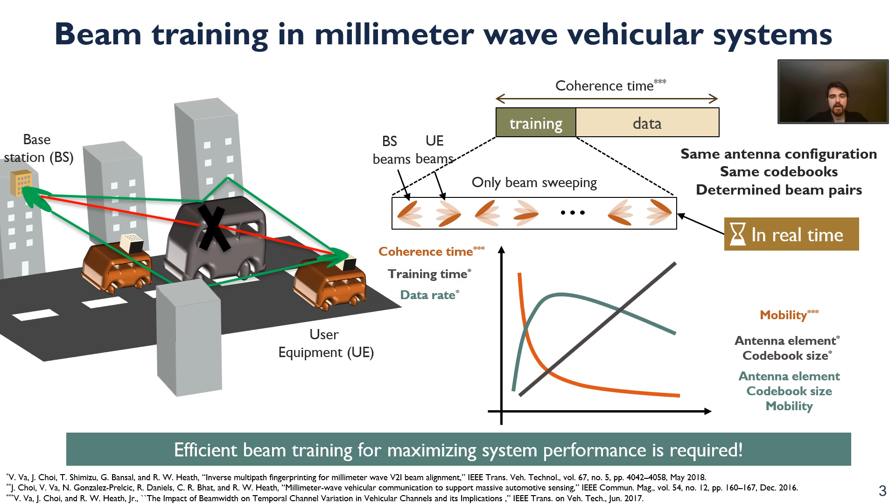The beam training problem was tackled by many approaches in the literature, and one of the solutions is to use side information in the form of radar, LiDAR point cloud, location, or camera images, taken by UEs or base stations. Using side information for beam selection decreases the overhead of beam sweeping, as proposed in the mentioned works. There are some other works focusing on codebook design utilizing side information. In this work, we will be focusing on beam selection.

The common approach in the literature is to have a centralized beam selection engine that selects the subset of all beam pairs based on the side information. I will refer to such selection as coupled selection from now on. Side information, as you might know, is mostly produced at the UE side, thanks to the sensors that the UEs are equipped with, such as radar, camera, or localization sensors.

In such centralized beam selection methodology, side information transfer to the centralized engine is required if the side information is not in the centralized entity. This is one of the challenges of coupled beam selection. The overhead is in real time, which occupies time from the beam coherence time, and accordingly decreases time for data transmission. The second challenge arises when the UEs have different antenna structures or even different codebooks.

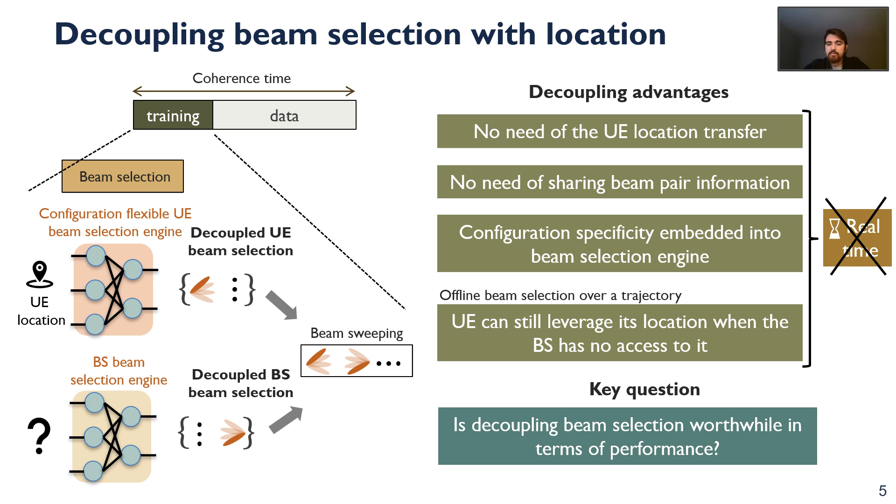We define the general beam training problem as follows. Let's consider a region of interest in an urban street, where the UEs might be located in any place in the region of interest. The beam selection problem is to construct a beam pair subset S for any location in the region of interest to maximize the throughput ratio subject to the cardinality of the selected beam subset being equal to N_B. This maximization translates to the question of how S is constructed, in a coupled or decoupled fashion, with what information.

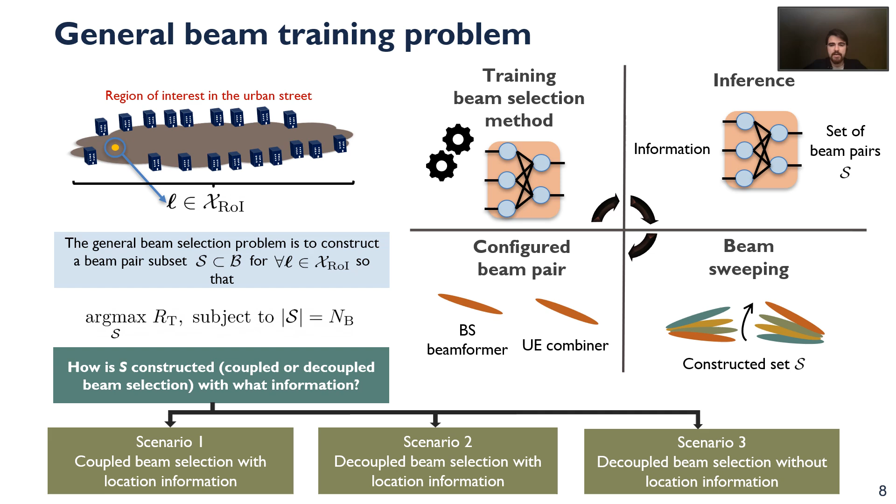Let's look at the beam training scenarios more closely. In the first scenario, the base station has a model that predicts the beam pair subset S based on the location information. And the UE is assumed to have its location through localization sensors. And the UE location is transferred to the base station. And the beam selection approach is joint beam selection.

And in the second scenario, the base station and the UE have separate models, where the base station model selects a beamformer subset from the base station codebook, and the UE model selects, based on the UE location, a subset of UE combiners, such that the throughput ratio is maximized. Again, the available information is the same, and the beam selection approach is decoupled beam selection.

And in the third scenario, the only difference from the second is the base station doesn't have the location information. And the base station model predicts a subset of beam pairs from the base station beams so that the subset covers the entire region of interest to maximize the throughput ratio.

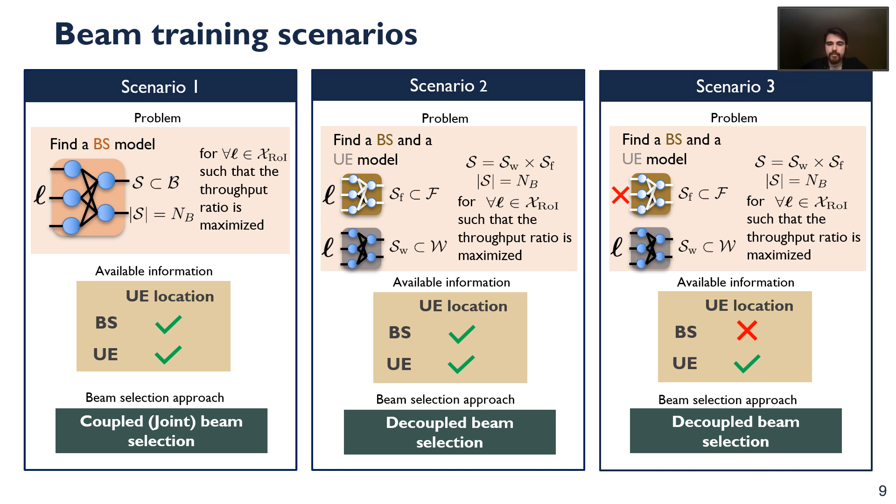Let's look at the beam selection method for different scenarios. In this work, we configure the beam selection models using a dataset illustrated in the brownish table. And we assume the same dataset is used for all scenarios for fairness. We do not specify how these models are trained and the dataset is collected in real implementation. And it's one of the future extensions of this study.

And let's look at the table. The table consists of throughput ratio measurements for all beam pairs in the codebook B for specific locations. Such a dataset can be collected through drive tests, even with some people permitting to share location information in a short amount of time. And each row of the table is called a throughput ratio vector for a specific location.

And there is another expression that we denote as approximate throughput ratio for the base station beamformers and the UE combiners. And for the J-th base station beam, the approximate throughput ratio is calculated by the mean of the throughput ratios for the J-th base station beam over all UE combiners. And the approximate throughput ratio for the UE combiner is calculated using the same methodology. And this procedure can be thought of as calculating the marginal throughput ratios provided by the base station beamformers and the UE combiners.

And in the first scenario, for the beam selection method, we consider a regression model which predicts the throughput ratios given the location information for all beam pairs. And then after the prediction, NB beams with the greatest throughput ratios are selected for the first scenario to construct beam pair subset S.

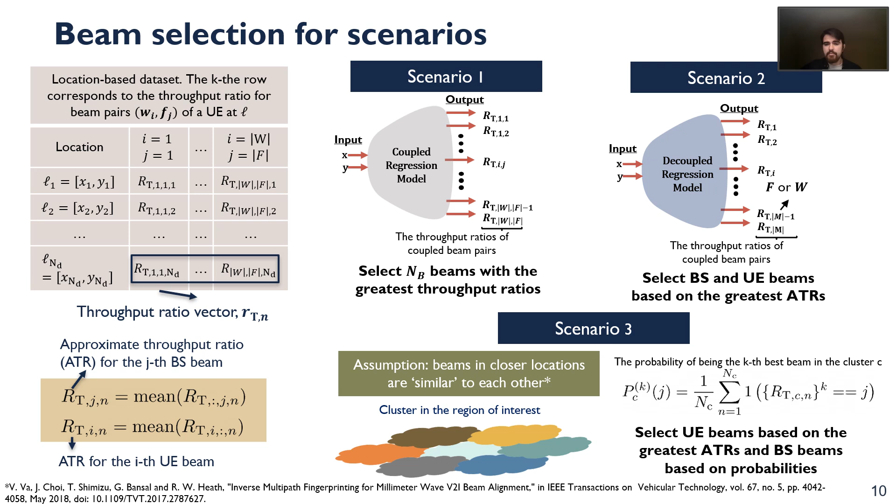And let's look at the simulation results of our work. The vehicular simulation scenario that we consider in this work is an urban street in Paris. In a 4-lane roadway, there is a base station next to the roadside, which is mounted on a building wall. And the buses are reflectors and blockers in the scene, and the UEs are the cars with antennas on top of their roof.

And simulation parameters are given as follows. And the channels were generated based on these simulation parameters in Sionna, which creates spatially consistent ray-traced channels. And the performance metric that we consider is throughput ratio, which is the average throughput ratio over all test cases. And the misalignment probability is the probability of not including the best beam pair in the selected subset S over the test cases.

And for the regression task, for throughput ratio and approximate throughput ratio, all for different scenarios, we evaluated lightweight neural networks, random forest, XGBoost, and linear regression, and XGBoost outperformed all the other three. Then we used XGBoost in our simulation results. We specifically consider lightweight models because these models will be deployed in the UEs, which need to be memory efficient and should have less inference time.

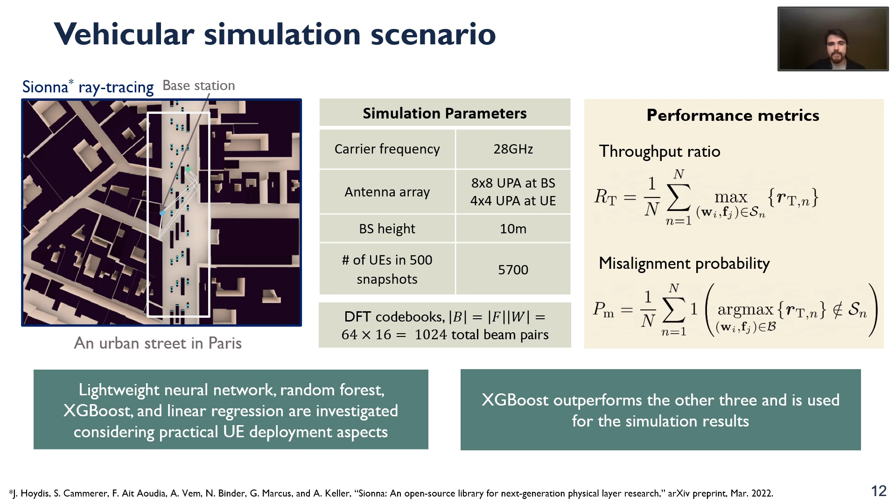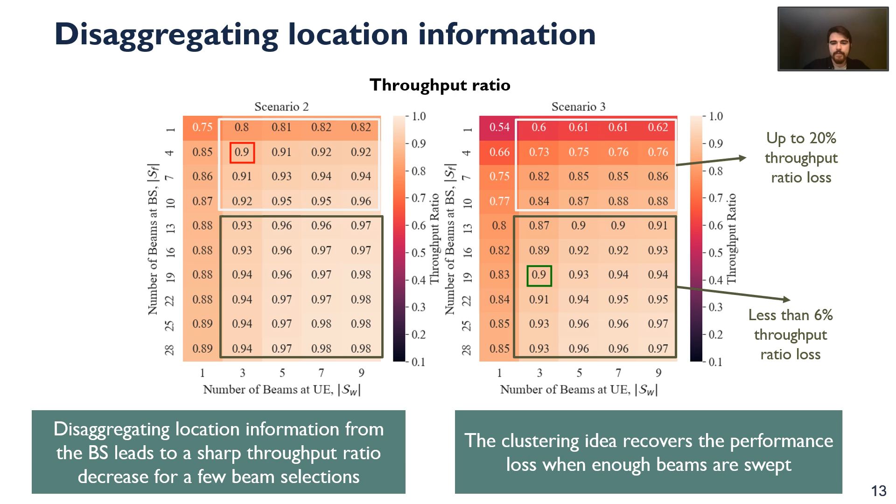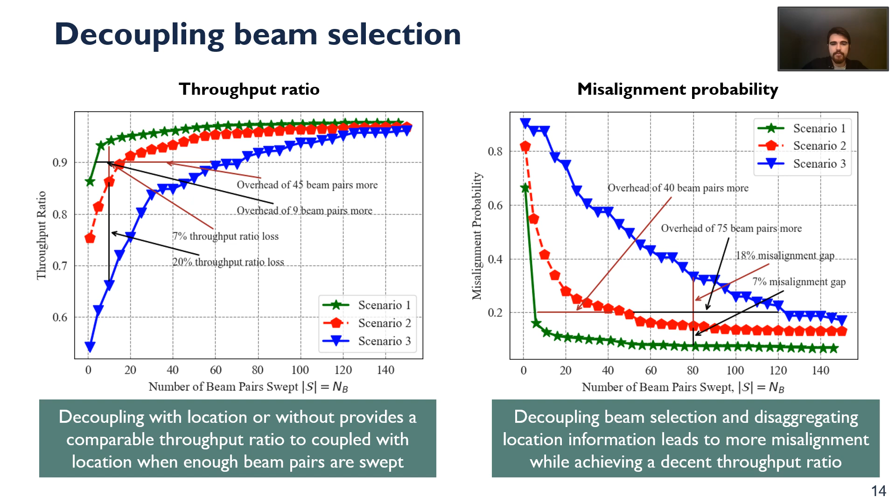And the key takeaway from this throughput ratio plot is decoupling with location or without provides a comparable throughput ratio to coupled with location when approximately 10%, which is around 100 beam pairs, are swept. And misalignment probability is a metric that is harder to achieve. Decoupling beam selection and disaggregating location information leads to more misalignment while achieving a decent throughput ratio comparable to the first and second scenario in selecting approximately 10% of total beam pairs.

The first key takeaway of our work is decoupling the beam selection with the presence of UE location performs very similar to the coupled beam selection, which shows that decoupling does not deteriorate the performance of the beam selection as compared to the joint beam selection. Therefore, beam selection methods specific to UE can be developed to exploit the sensor information that is already available at the UE side. And disaggregating location information from the base station leads to a performance decrease, but clustering UEs into small regions helps to recover the performance.

Even though the base station doesn't have the sensor information, it can still utilize some old data which can increase the performance of the beam selection and accordingly the data rate. And in this work, we assume that the dataset exists and the UEs are deployed with the models. In our future work, we are planning to analyze the practical aspects of decoupled beam training and how to exploit decoupling for heterogeneous devices.